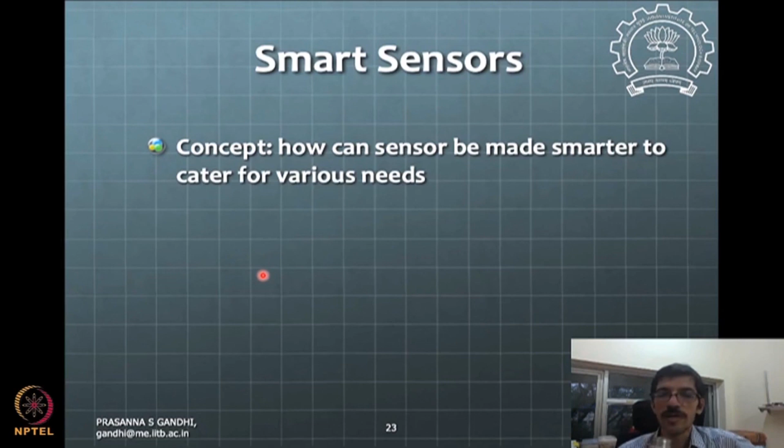We'll talk and discuss a bit more about this example - what kind of ideas can be incorporated to enhance the range. Let's talk specifically about this weight measurement - how the weight measurement principle is done. Think about that and we'll come to it in a minute. So let's say you have to enhance the range of the sensor with this specific example of a weight balance - a weight balance typically has a spring.

You put some weight, the spring will deform and go down, and typically on the scale you will see some weight measurement. This is one of the ways of measuring weight. Another way is the kind of balance that vegetable vendors use, but right now let's just focus on this kind of system for weight measurement.

So the markings here are typically 1 mm marks, which we can identify from one to the other. Maybe 1 mm we can identify.

Now, if I want to weigh a very small quantity, or get a very fine resolution measurement, then I use a spring with low rigidity, a highly flexible spring. So even for a small weight, it's going to get deformed, and I can see its marking on the weight scale here.

Now if I get this spring to go smaller in stiffness, or higher flexibility, then from this point to this point, if the pointer can move, say this point being a limit, that spring gets completely compressed here, and this is a starting point. So the range you will be able to measure is proportional to the stiffness times the displacement. That's the whole displacement possible for the spring, and stiffness times that gives a small range, because the stiffness is very small.

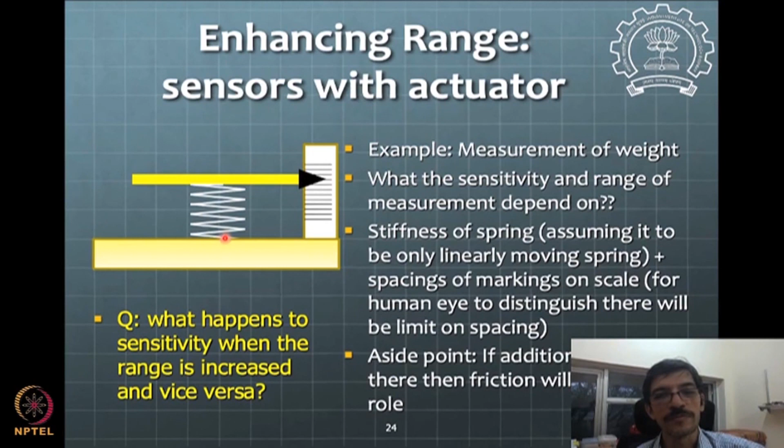So the question is, how do you enhance this range of measurement even for a small stiffness, or high resolution, scenario? You appreciate this point: the sensitivity would decrease if there's a demand for higher range, or resolution will be low for higher range, and vice versa.

So if you want to increase the weight range, I propose that we put an actuator in this sensor. I form a small feedback system around this sensor, such that the actuator is now giving an additional force. I measure this on the scale, take its feedback to my actuator, and actuate the actuator such that this reading always points to zero.

So even if I put some weight there, the actuator will come into play. The sequence happens like this: I put a weight on this surface, then this pointer is going to go down. That means there is some error produced, away from the zero position, and that error is fed back to the actuator, which gives some force and brings it back to zero.

This way, you can always maintain some small zero as a balance. It's called null balance. You null balance the system always, no matter how much weight I'm putting — my system is always balanced.

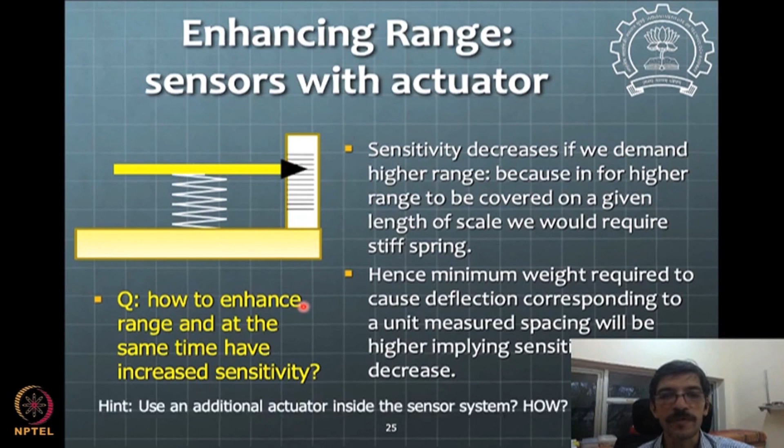One can think about what kind of actuator, how we can put it, and all those kinds of things — we are not right now worried about that, but we make sure the actuator also doesn't have any additional friction force and things like that.

Can you see this idea? With this idea, one can enhance the range of the sensor and keep the resolution the same, and you get some additional advantages — any non-linearities existing in the system won't bother you here.

Sorry about my mobile. So, no non-linearities in the system — for example, a spring, as you deform it more and more, it might become non-linear. Instead of your scale being linear, the spring behaves in a non-linear fashion because of the large deformations.

To compensate for that, you would have this marking also put in some kind of a non-linear way, but because we are doing this null balance with the actuator here, we don't need to do that. You see, this is a big advantage that you get by doing this.

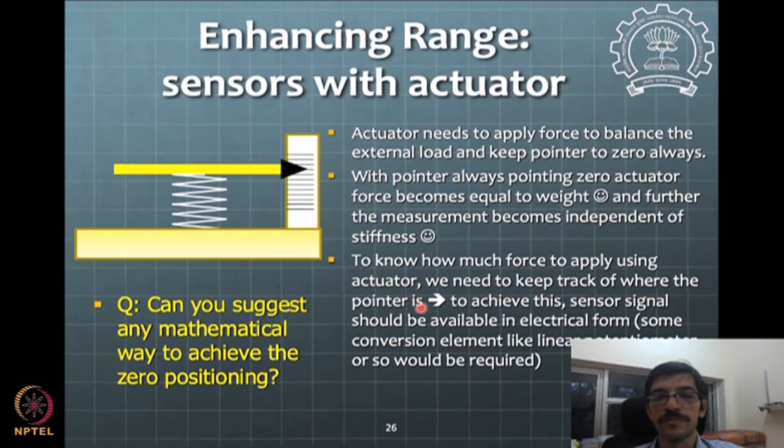Now one can do some mathematics: the actuator force is, say, proportional, a KP kind of control. Then how do you analyze this system? One can do a lot of mathematical jugglery beyond this to find out what proportional constant I should use, or whether I need a derivative as well. Probably you'll need derivative control to make sure your system settles into the final position rather than oscillating in the steady state.

Typically, friction will be there in these practical systems. So even if you don't put the derivative control in place, there will be natural damping because of the friction in the system, and your system will finally settle down. It's not going to continue oscillating forever.

So you can think of this mathematical model to represent the dynamics of the system, then formulate your control strategy and validate how your error behavior happens. Maybe you can try this exercise yourself and then look at some of the developments given in the slide.

For any kind of system, we'll come to this in more detail when we start modeling different kinds of systems. But typically for modeling, say you have this system with the actuator; there is some mass, the dead weight of the stage itself, then a stiffness, and some damping you can consider here. This becomes a simple spring mass damper system, with the very well known equation: the force applied on the system equals mass times acceleration plus c times x dot plus k times x.

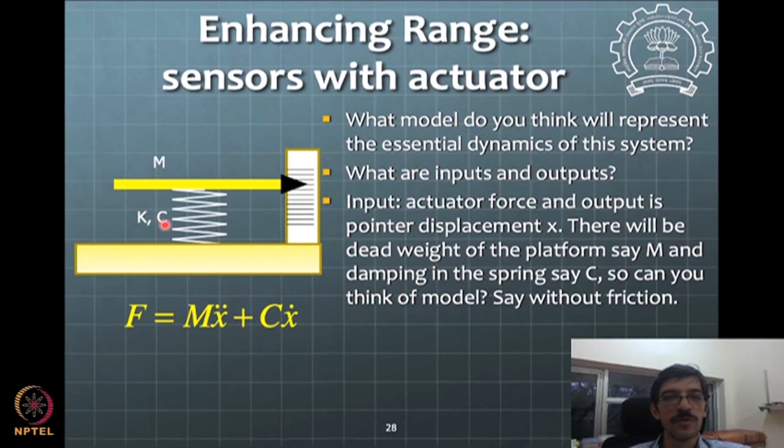So this F that we talk about here is the force of the actuator. That has to balance, finally, the dynamics of the system.

I'm sorry, to switch off these.

Yeah. Okay, so the steady state value of the force will give you the final reading. So these are the two expressions for the force. One is based on the dynamics of the system, and the other expression is what you would develop as a control strategy based on the feedback.

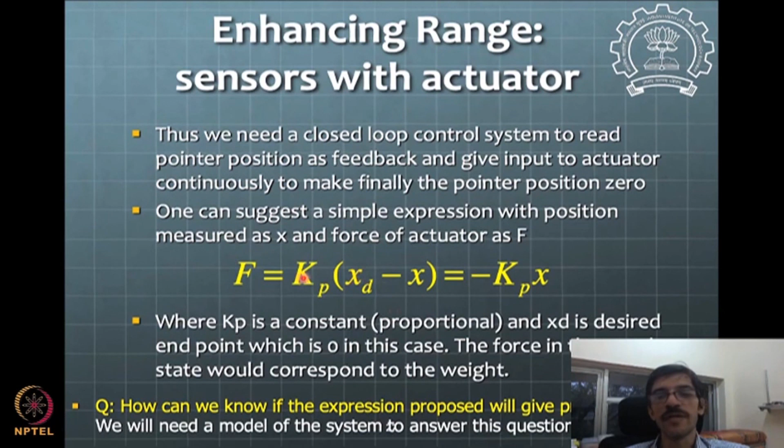So the previous expression that you saw here was, we are considering that we'll apply the actuator force to be equal to this amount. So that was our feedback in some sense for the system. So when xd is null balance or zero, you'll get this as a feedback expression for the force, and this is the system dynamics. I think there's a term corresponding to the spring missing here. K times x also will be coming as an additional term here.

And then we'll apply some proportional control kp times x as this force. So that's how the things are going to happen. Right now the friction in the system is neglected. So when you do analysis of how this control would work, or how this control will settle the system, you need to substitute this value of force, as you are proposing as a control here, in the expression of dynamics, and then do the analysis, and then you'll be able to find out

the details of how this proportional feedback that you are proposing is going to affect your system, or affect your state x of the system, or you can convert this state x into the error dynamics and study what will happen to the error, how will it go to zero, will it go to zero instantaneously, or will it oscillate, how I can have the settling time of those oscillations controlled. All those kinds of things one can talk about in a lot more detail.

Okay, so we'll come to some more analysis of such kind as we progress. You have done something already, but now we'll see from a little bit more practical perspective when the friction and other terms are there, or if you want to model the motor, the actuator, also in the system in some way. How do you take care of some of these things that will be seen here.

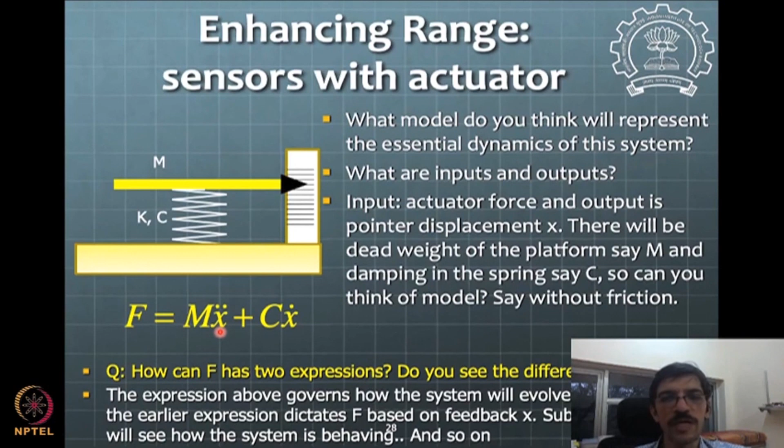So the screw kind of actuators will not work here unless there is very smooth back drivability. Typically screw actuators will not have back drivability. So here we need non-friction, non-contact linear actuators to drive the system. Then things are going to work much better. So you can think about whether you yourself are able to do this error analysis here with one control expression or some other control expression, and we can talk about that in more detail later. Okay.